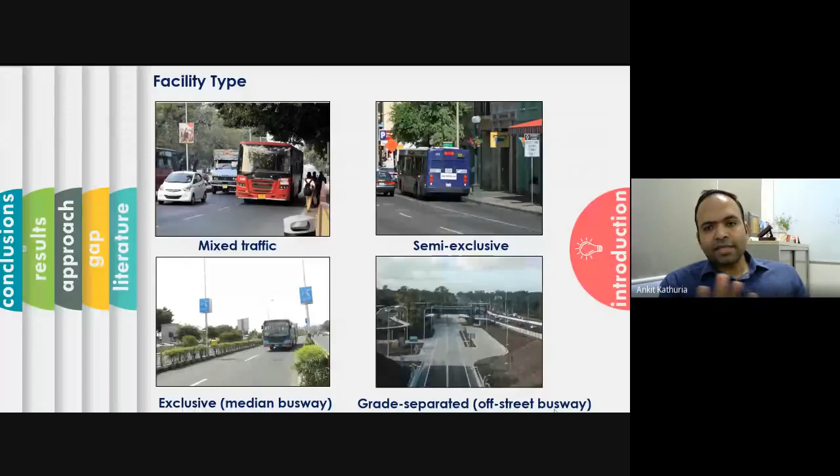So these are the four facility types I wanted to discuss regarding bus transit systems. We are more interested in the exclusive system, and today I'll talk more about it, which in India is also known as bus rapid transit system.

I have specifically selected this median transit system because in India, at most places you observe, it will always be the median bus transit system.

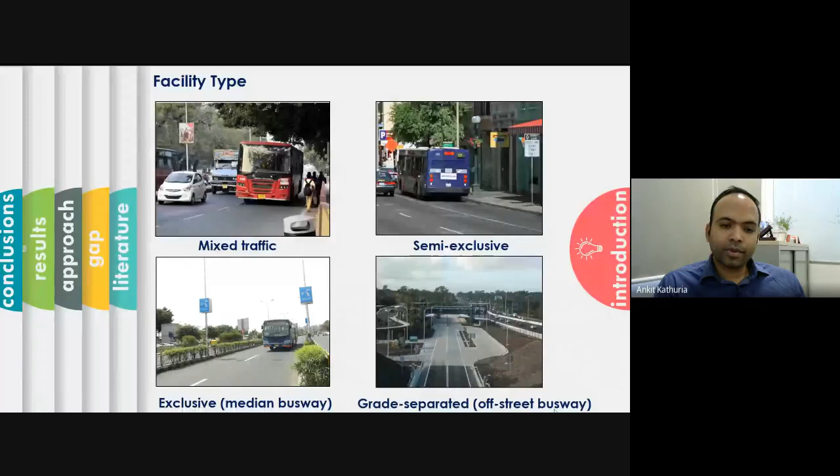Moving further, after explaining the facility type, it becomes important to give some data-based understanding. This figure is taken from the Transit Capacity and Quality of Service Manual, a very famous manual used for understanding operations of bus transit systems. However, for India, we don't have this kind of manual as of now, so we are using the TCQSM, given by the Transportation Research Board, USA.

From that manual, it clearly specifies what kind of operational service each facility type offers. If we consider vehicle speed compared against some base condition, an exclusive median lane system performs better than a mixed traffic system, and a grade separated system performs better than the exclusive system. This just shows the difference in terms of the speed offered.

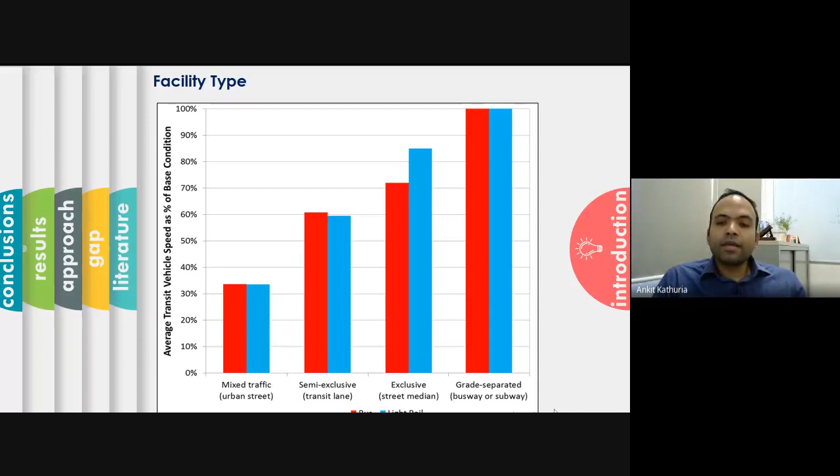When we talk about transit operation, meaning operation of this bus system, there are three important parameters to keep in mind. This is based on the definition given by the so-called father of public transportation systems, Vukan R. Vuchic, who clearly states that transit operation deals with three major factors: the first is capacity, the second is speed, and the third is reliability of the system.

Capacity, anyhow, we'll be talking about capacity. But understand, all these factors are linked together. Speed is linked with capacity, and reliability is also linked with capacity.

Capacity we are talking about, but for those who don't know what I'm talking about in transit reliability: reliability of a system means that if today a bus unit is coming at 10 o'clock, tomorrow that same bus unit comes at 10:10, or 10:20, and on the third day it comes at 9:50. This tells about the poor reliability, you know, because it's not reliable. In very layman language, I'm telling you the system is not reliable.

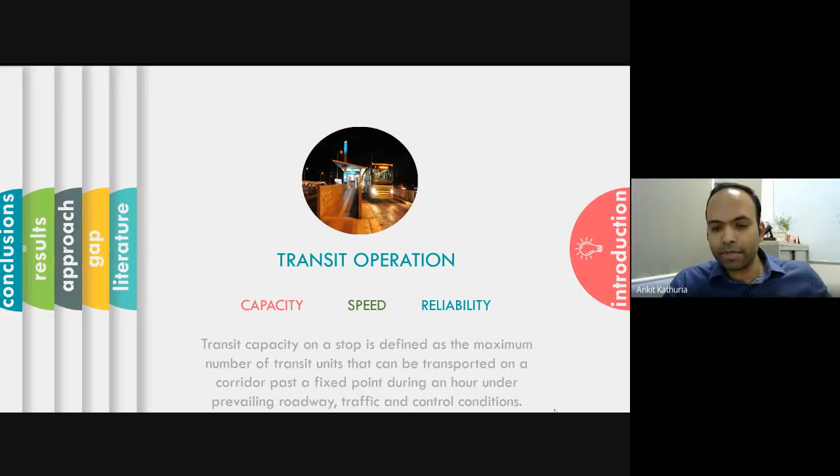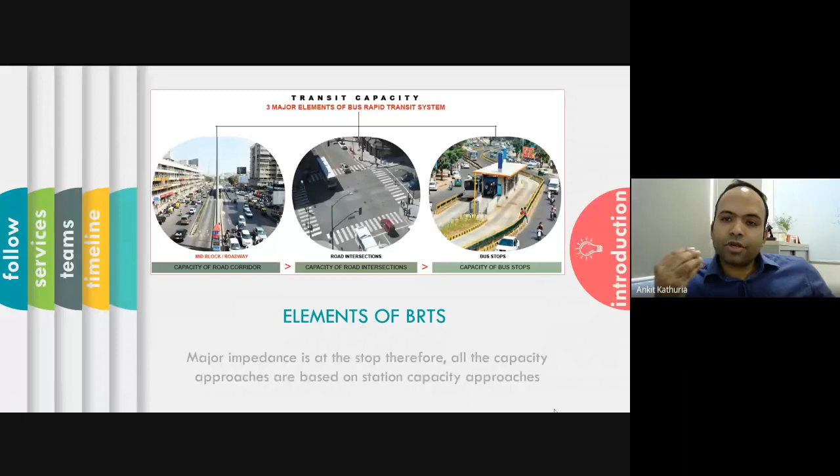Moving forward, whenever we have to estimate transit capacity in any corridor, there are majorly three impedance points. Let's say we are talking about a BRTS corridor - you see the third photograph here, a similar kind of BRTS corridor. So in this photograph, what could be the impedance point? Impedance point means where will your vehicle be stopping. Let's say your vehicle will be stopping at the intersection.

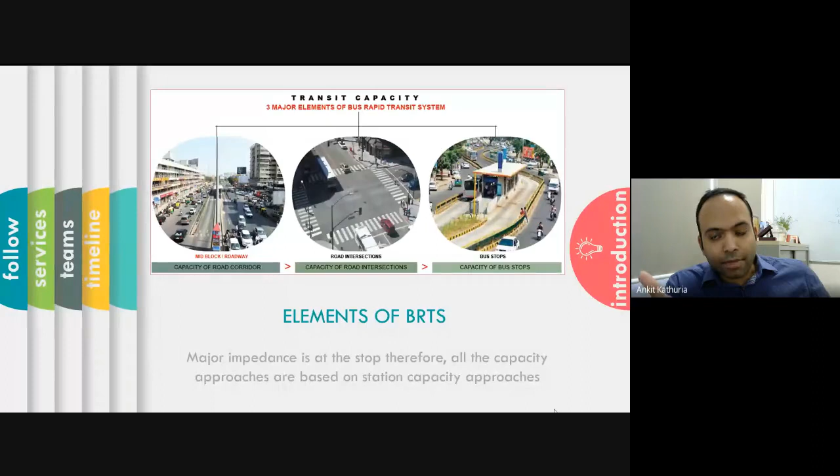Your vehicle may be stopping at a bus stop because it has to wait for the passengers to get down and board. It can also be that this impedance is somewhere in the mid-block. Let's say in any city, for the entire corridor, the BRTS can't be provided. Although the system is named bus rapid transit system, there would be corridors where you can't dedicate your entire road length for this system. So you will allow the buses to move as normal under heterogeneous traffic conditions, and then wherever space is available, the bus will rejoin this particular corridor.

So my point here is, whenever we have to estimate capacity, we have to look at the impedance point - out of all these three points - which is the impedance point where the bus will be stopping for the maximum amount of time. It was observed from empirical data that the bus is stopping for the maximum time at the bus stops, because it has to wait and it is mandatory that they stop. So if this becomes the major impedance point, it will control the capacity, because if it is waiting for the maximum time here, this will be the controlling point.

It is very important to understand that all the capacity approaches of any transit system are based on the stop capacity approach. People usually ask me, sir, if there are signals, why can't we calculate capacity of the signal and that will be the capacity of the bus system? Or people also ask me, sir, there is a mid-block capacity - if there are any PG students, we calculate capacity of any road, any 10-meter, 7-meter road, based on the Greenshields model. It's a model wherein you calculate the flow of traffic that is moving, and based on that flow, you will get a capacity value with respect to whatever speed it is moving. So that cannot be done with the public transport system. For a public transport system, you have to follow the bus stop capacity approach for estimating capacity of a particular system.

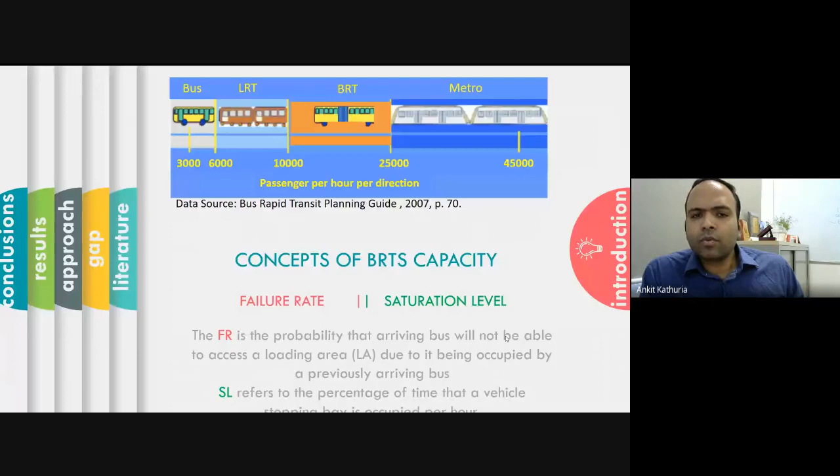Further - sorry, okay. See, there is a reason. Okay, we have seen the delays, but there is a reason why we are estimating capacity. I will take some time on this slide.

Why was there a need to estimate these numbers? When we talk about capacity, we are talking about some numbers - how many passengers this particular system can carry in one hour. Because when an authority wants to take a decision whether we should select a BRTS, whether we should select a metro, whether we should select a light rail transit, or whether we should not go for BRTS and only go for a normal bus transit system, these numbers play a very, very major role.

See, I have put a very beautiful figure here. The capacity in terms of passengers per hour offered by a bus is 3,000 to 6,000. You must be thinking, sir, you just mentioned the definition of capacity in terms of vehicles per hour, but you can convert it into passengers per hour by multiplying with average occupancy - these numbers can be taken in passengers per hour also. So the amount of passengers per hour that can travel in one direction: for bus, it is between 3,000 to 6,000; for LRT, it is between 6,000 to 10,000; for BRT, it is between 10,000 to 25,000; and for metro, it is between 25,000 to 45,000.

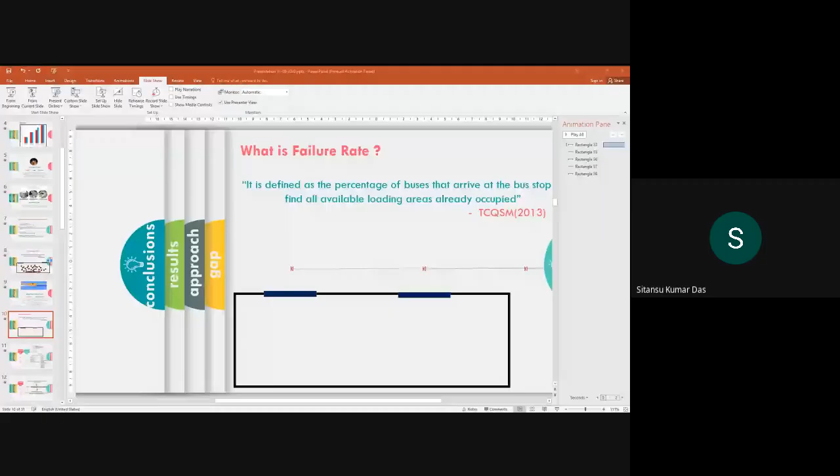Sir, actually we are not able to share the slides with you. Maybe the same problem happened again—somebody shared the screen? If somebody is doing this, please don't share the screen because it creates a problem. It's visible, sir, someone mentioned it's visible. God, it really disturbs the flow. Actually, the energy of teaching sometimes goes with doing all these things. Pin the presentation screen. I think the pinning of the screen needs to be done at my end. Let me understand.

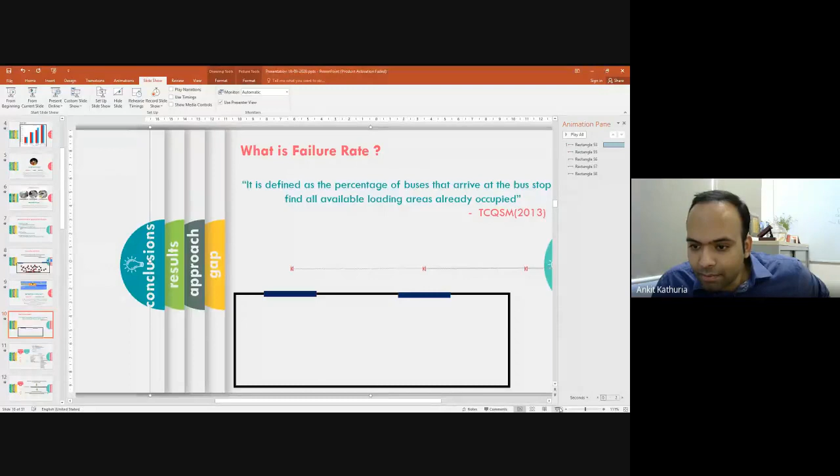All right, I think the rest of you can just switch on your microphone, no worries. Again, stop me if it's not visible. Okay, it's the best I can do sometimes. God, it happens, it happens with the online thing. Every now and then we are just taking online lectures. So anyways, Professor Das, just stop me, no worries, I'll repeat again.

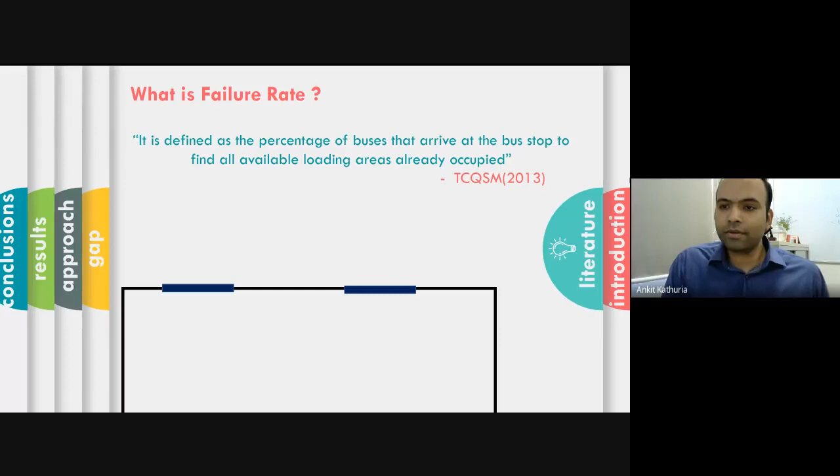Okay, so a brief animation I have prepared for this failure rate to explain what is failure rate. I've already explained in my words, but it is important for you to see. When one bus comes, it dwells for the passengers to board and alight.

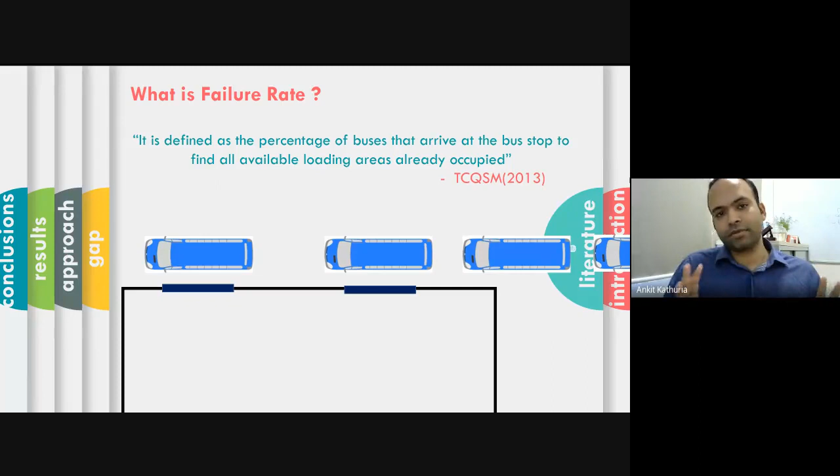Another bus is coming, it is dwelling, waiting for passengers to board and alight. Now, every subsequent bus that is coming and waiting in queue is nothing but coming under this failure rate calculation—very simple. We'll see in detail how this percentage of buses which are coming and getting delayed is used in calculation. It's a very interesting concept, by the way.

So till now we have looked at these two: one is the failure rate approach and one is the saturation rate approach. But it's important to see that these two approaches have been used in literature for quite a long time. The failure rate approach is still in use.

But there is always a clash—half of the industry and researchers say we'll use the failure rate approach, others say saturation level approach. There are some problems and issues with both of them, and I'll explain. That's why there is always a clash.

So when we talk about the basic capacity formula, you guys have to be with me in this formula, because if you understand this, then the rest of the slides will be just a cakewalk.

You are estimating capacity. Please understand, in the numerator it is the seconds in hour available for bus movement, and in the denominator is seconds that the bus occupies the stop.

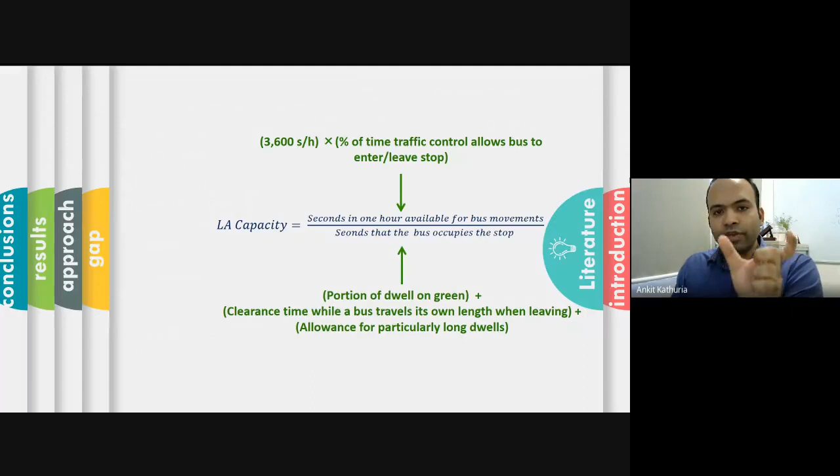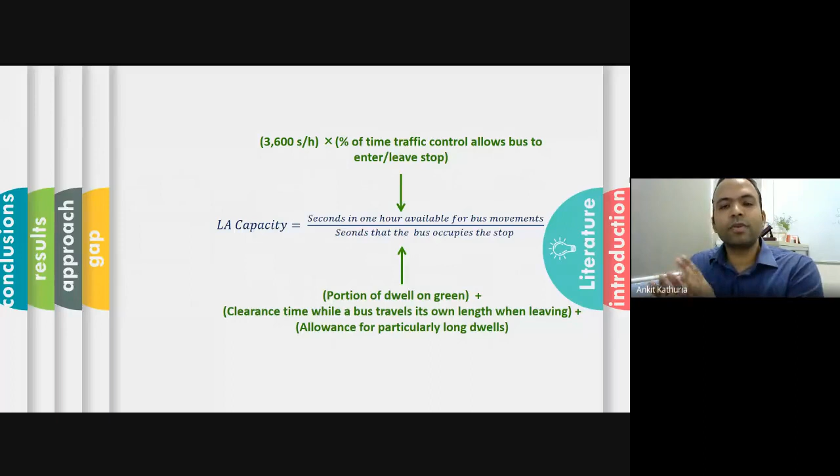So what we are doing in this numerator to estimate a value, we are multiplying 3600, which is number of seconds per hour, by the percentage of time traffic control allows to enter or leave. This percentage of time can be converted in the form of green is to cycle time. Every signal has a particular cycle time, so we can convert it into green is to cycle time, which will give you this percentage of green time in a particular cycle time. Now this numerator is multiplied by 3600.

Further, in the denominator, this tells you information that is seconds that the bus occupies the stop. So for the time the bus will occupy the stop, this will include the portion of dwell time, time for boarding and alighting, and clearance time, like the time for the bus to travel its own length and clear the stop, which is also time wasted in the public transportation system.

Third is allowance for particularly longer dwell. If you are estimating capacity, you have to keep some factor related to probability, that we are allowing for particularly long dwells. Not every dwell time will be at average dwell time.

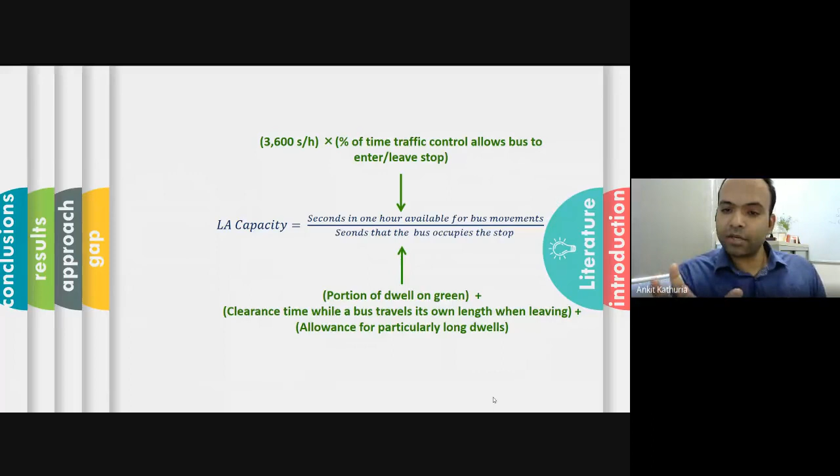Let's say average dwell time is 15 seconds. Not every bus will come at 15 seconds. Some buses might stop for 15 seconds, some may wait for 20 seconds, some may wait for 22 seconds also. So we have to allow for particularly longer dwells, and that particular factor will also go in the form of this denominator.

And now the thing will become more clear when we look at this particular formula. So this is what I was talking about. 3600 here is nothing but the number of seconds in an hour available for the bus movement.

Green is to cycle time means that if there is a signal and there is a certain cycle time in that signal, that cycle time will comprise green time, red time, yellow time, and out of that particular cycle time, how much is the green time? Only that particular time will be allowed for the movement of the traffic or the movement of the buses. That will cause a reduction in the number of seconds available for the bus movement.

If there is no signal, if the bus is not near the signal, you take this G by C as 1. You are dividing this term by a clearance time, which I told is the time taken by the bus to cross its own length.

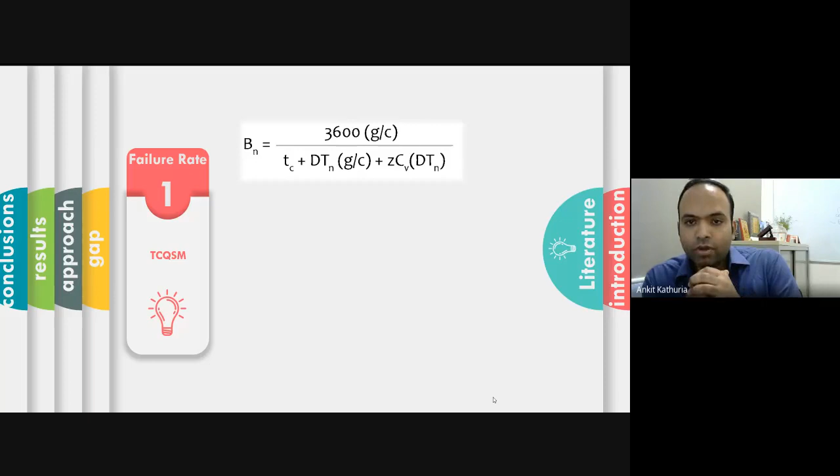Then the dwell time - you're also multiplying the dwell time by G by C. Why are you multiplying the dwell time by G by C? Because if your stop is near the signal and it's already green, but your bus is still stopping, you are wasting that time. So that's why we are multiplying this G by C with the dwell time plus allowance for a particularly longer dwell.

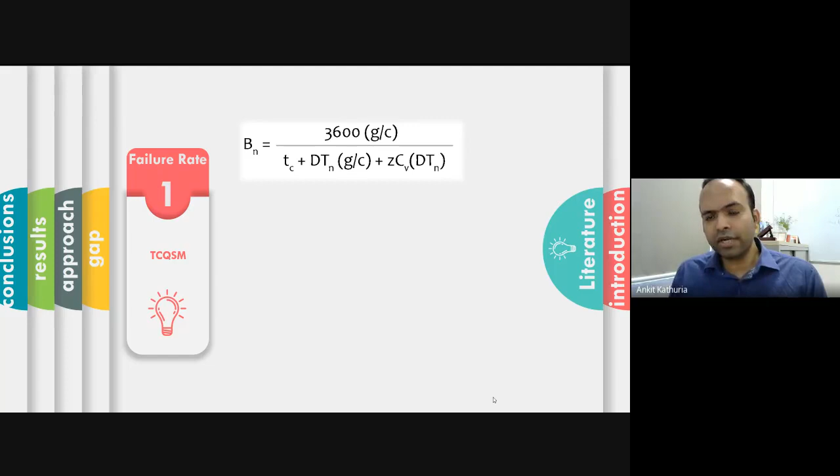So this particular term is converted into three terms, which are Z, CV, and DT. Z is a term related to the distribution of the dwell time - I'll explain how it is related. CV is the coefficient of variation of dwell time, and DT here is nothing but the average dwell time.

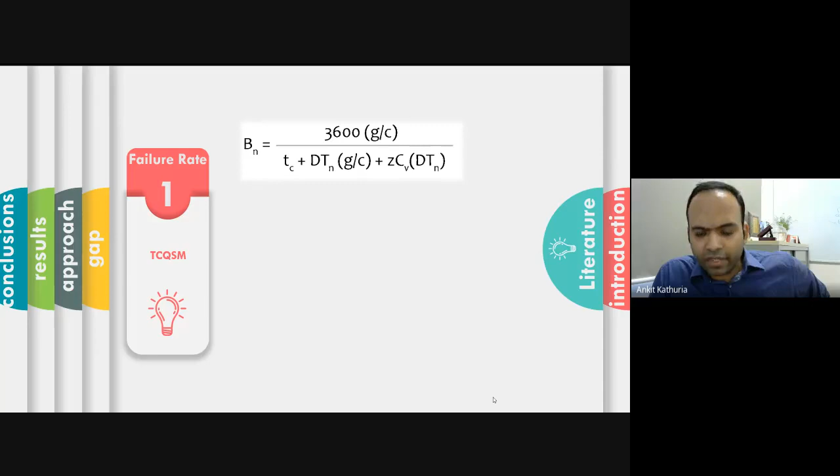So note the equation. Why am I explaining this? So that you are comfortable with the parameters. This is what BN talks about, the capacity of a particular loading area. 3600 is the number of seconds, as I've already talked about. G by C is the green time ratio. Z is the standard normal variable corresponding to a desired failure rate.

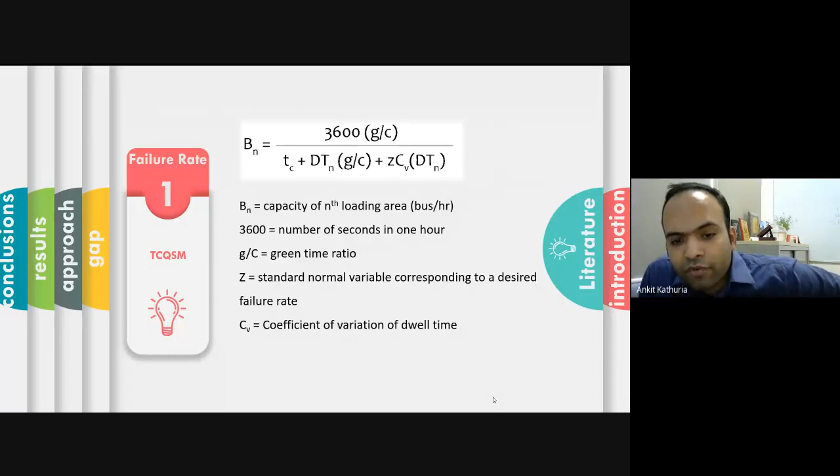This Z value that we will be estimating, we will connect it to failure rate, and then we will do the estimation. Further, CV will give you information about the coefficient of variation of dwell time. Now, this particular term ZCV(DT) is nothing but what is known as operating margin.

Why is it operating margin? Because it is the maximum amount of time that an individual bus dwell time can exceed average dwell time. So as I explained, not every bus will come at 15 seconds - some buses can come a little later also. So in that case, you are providing for that extra allowance. This is nothing but why it's known as operating margin, or TOM.

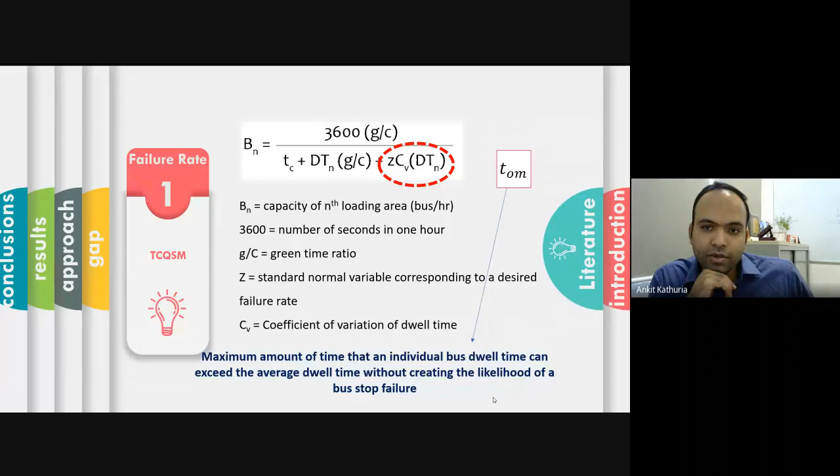Moving further. So we were talking about, sorry.

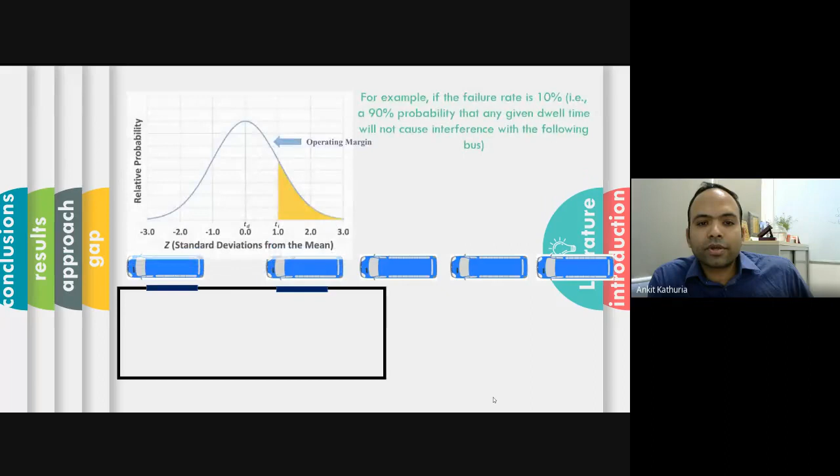Failure rate here is the percentage of these buses which are standing in queue per hour. How many percentage of buses stand in queue, though that particular data is linked to some kind of normal distribution. So don't get confused.

Normal distribution here is a distribution of the dwell time. This failure rate is checked with this normal distribution. For example, if the failure rate is 10%, that is, 10% of the buses in a particular hour are not finding the loading area free, then based on this distribution, there is a 90% probability that the dwell time will not cause interference with the following bus.

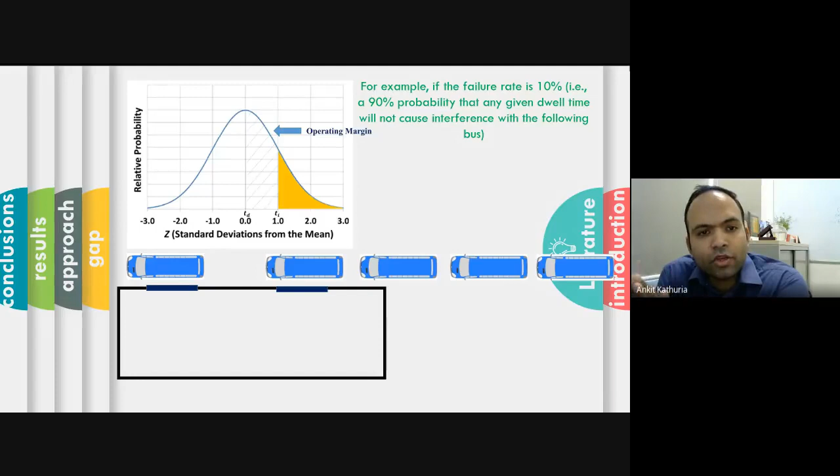So very simply, I'm trying to explain that this 10% value will be used to find nothing but a certain Z value, and this Z value will come from this normal distribution dwell time graph.

A little conversion quickly to understand for students who are not aware as to how we estimate the Z value. Z value is nothing but we are estimating there is a certain average dwell time and there is a certain particular value of dwell time. When we subtract that, divided by standard deviation, we get some Z value. This Z term can vary from anywhere around -3 to 3.

Now, operating margin is estimated by multiplying this Z value with the average dwell time, which is DT here, and the coefficient of variation of dwell time.

So the major assumption of the failure rate approach is that it floats over an assumption that dwell time always follows normal distribution. This is the biggest assumption.

So normal distribution, for UG people if it is getting a little difficult, is nothing but you are modeling your data in a way that it is following a certain type of bell-shaped curve. So you have modeled your data, and this was the closest model of your data, that your data is following some sort of bell-shaped curve.

So this is an assumption of the failure rate approach, but every time your distribution, or the dwell time, will not follow normal distribution. So this assumption, according to some researchers, some authority people, they always question me on this.

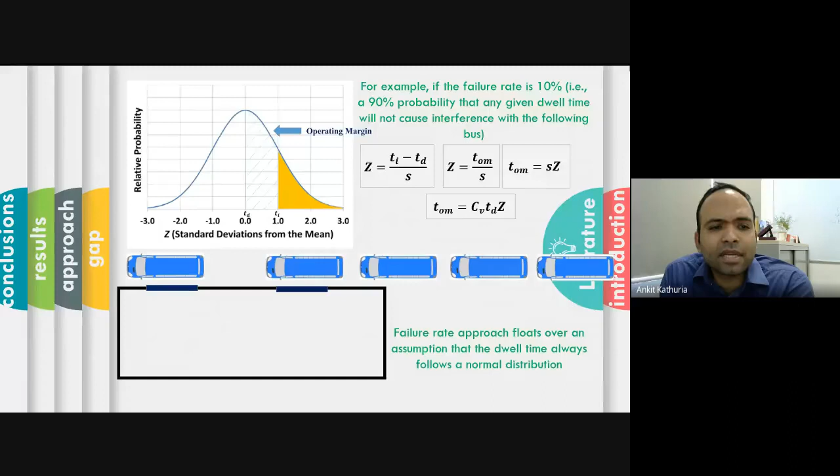Whenever we were working for some kind of transportation, we were making some timetables, we were estimating some capacity of some systems. Every now and then they put a question here: how are you taking a particular dwell time to be normal distributed? So this is one big assumption on the shoulders of the failure rate approach, for which many people are not comfortable with.

Now, the next important method is the saturation level. So the formula that you just saw was the failure rate approach, and the formula that you are looking at now is the saturation level approach. It is all a similar kind of formula.

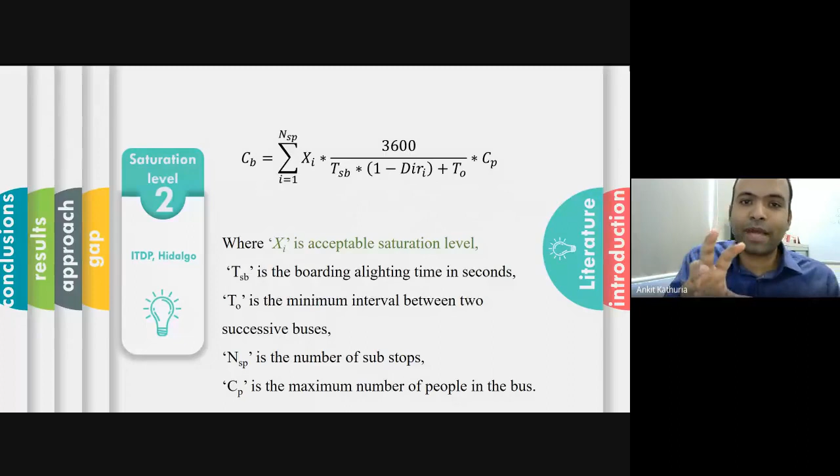You are dividing 3600, which is the number of seconds available per hour, by similar kind of parameters. But the only thing that is changing in this formula is that a new parameter xi has been introduced. In the last formula you saw, there was some operating margin in the denominator. That concept has been changed, and a new parameter xi has been provided here in this particular approach.

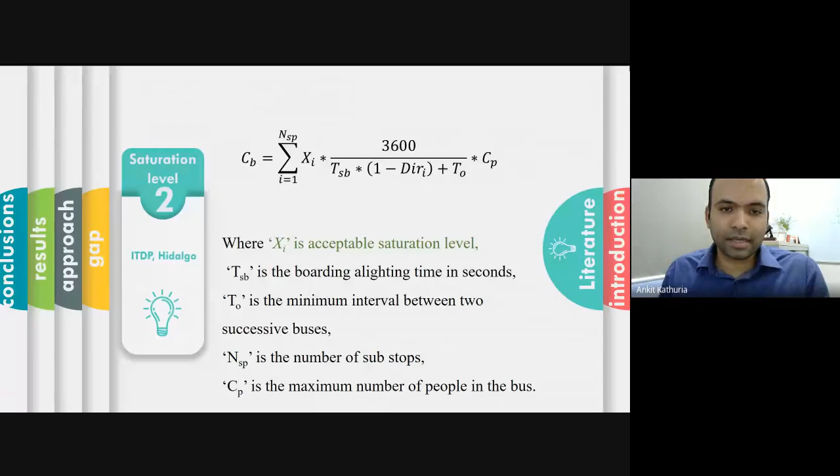And xi is nothing but the acceptable saturation level. It is the percentage of time for which your loading areas were occupied. So let's say if it is occupied for 60% of the time, this xi value will be 0.6. If it is occupied for 40% of the time, the xi value will be 0.4. So this becomes the second approach for estimating capacity of a system.

So what were the gaps, and why in India, what was the need? I mean, why I thought of working on it.

Till now in India, we were estimating capacity of this BRTS system considering a 25% failure rate. Without looking at our data, we just considered 25% failure rate. It means that we were saying this is the maximum failure rate which is allowed for a particular system.

Let's say, to be more layman about it, if you will allow a very, very high failure rate, it means that you are compromising with the speed also. Because if you will allow more number of vehicles to wait in the queue at a particular stop, it means you are compromising with the journey speed of that particular bus.

Okay, but for conventional systems, this number was given as 25%. The documents told that you use this 25% number in your capacity estimation to estimate the capacity of the corridor. But the problem came that this 25% number was for normal conventional transit systems or normal bus services. Should this 25% be used for BRTS systems also? Because BRTS systems are dedicated systems.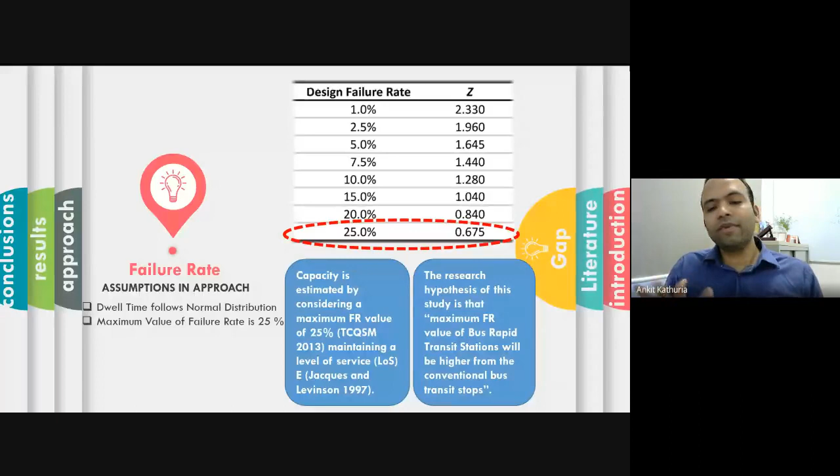considering failure rate. So 25% according to all these old manuals was compared to this 10 kilometer per hour speed. But again a second question came to our mind: if for BRTS systems we consider 25% failure rate, BRTS systems are not meant to run at 10 km per hour. If we consider capacity at 10 km per hour, then we are doing some blunder. So at least we have to put some benchmark, it should be 20 km per hour. Below that, if BRTS is offering that, then it's not a BRTS, it becomes a normal public transport system. So there were many thoughts coming to our mind about how do we play with this failure rate thing?

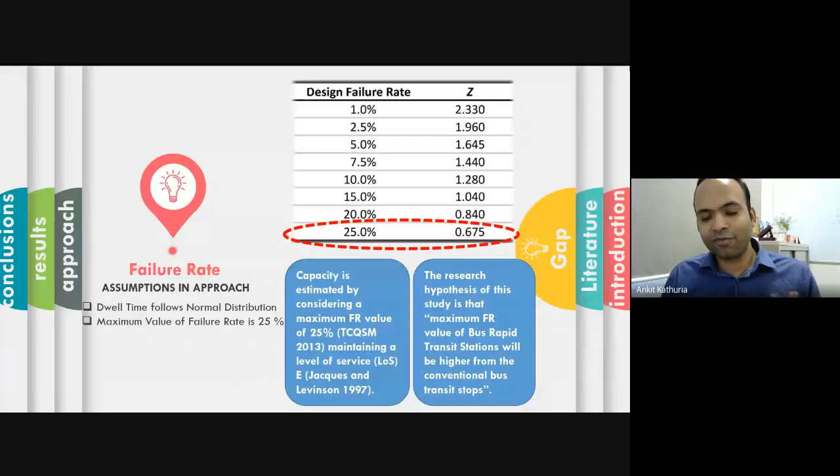You should imagine that there is a problem with doing any study on public transportation systems. The biggest problem is you can't just pour in buses on the field. If there is a BRTS system of Ahmedabad and I tell you the system is moving, now you tell me to add more buses and explain how things change - you can't do it on the field. If I tell you, okay, I want to observe the queue length, please add more buses - on field, it was not possible. So we were forced to use simulation or micro-simulation tools in this case.

One such micro-simulation tool that we used was VISSIM. VISSIM is a very commonly used micro-simulation tool in the transportation industry. You go to any company, many people know it. So in that tool, we got the flexibility of adding more buses and playing with the speed and the failure rate values. So this is just a thought, and this was the reason. And only on this thought, one of our publications came in a very reputed journal.

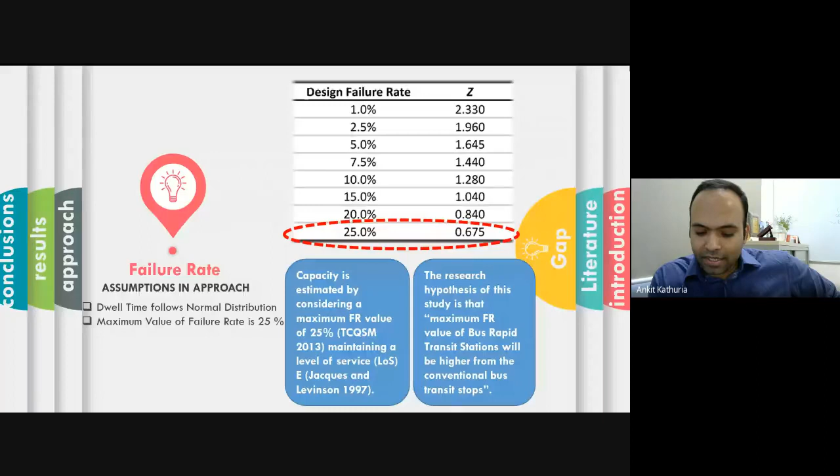So moving forward, even like failure rate, even the saturation level approach has an assumption. Failure rate had an assumption that dwell times are normally distributed, but the saturation level approach had an assumption that we have to select a saturation value of 0.6. The manual tells that you should always select 0.6 in the calculation of capacity. Then the thought always comes, why do we select 0.6?

I mean, you are forcing us to select that - okay, you mentioned that for 60% of the time your buses will occupy these stops, for 40% of the time it will be free. But how are we arriving at that 0.6 value? How can we be forced to use a 0.6 value? So then again, a second level of research comes into our mind: what should be this value of saturation level? Should it be 0.3, 0.4, or should it be 0.8? How do we arrive at that value? So this is part of the saturation level.

However, I will not be discussing saturation level in this class because I'll be explaining only the failure rate approach, moving forward while respecting the time also. So once these things were clear in our mind, we looked at the capacity formula, all these calculations. Don't worry, even I find these calculations very boring, but it is important to tell you sometimes. So when we looked at all these calculations, all these formulas, the next step was to practically take some BRTS system and start doing some work.

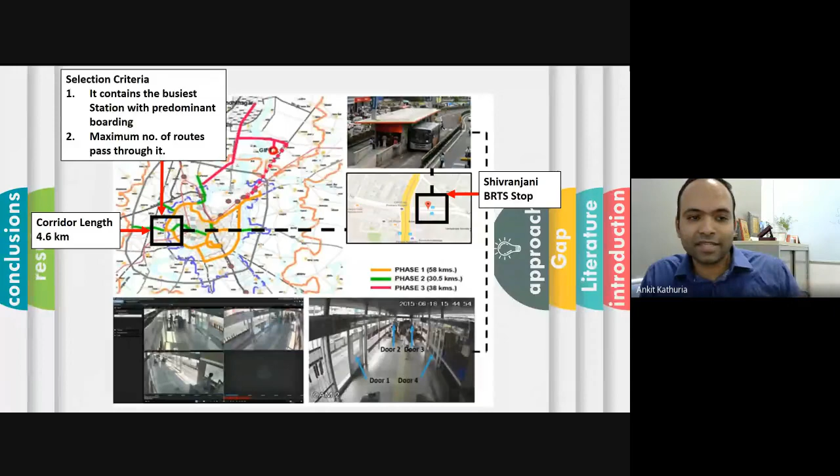So when you are talking about capacities, we have to focus on that particular corridor which is maximum loaded, because we have to give some kind of right calculation. So we focused on the busiest corridor and selected this 4.6 kilometer corridor for our study.

Now, this is how the station looked from inside. It's a very beautiful station. When I saw BRTS, it was my first time visiting Ahmedabad and seeing BRTS. My perception of buses was that bus systems are like any other stops, people standing on the road. But this was a very well managed stop, wherein the ticketing was done before you enter the bus, a very perfect example of a BRTS station or BRTS system. This is how it looks like.

Moving further, once we selected this corridor, the major problem came. These terms we are explaining, we wanted to check how much queuing a bus can take, how much failure rate a stop can take. Doing it practically on field, we were lost. We could not have done it. So that's why we thought we would take help of simulation tools.

We made this network, the entire network. We took a Google image, and then we created the network, the entire corridor, on the Vissim platform. This is a little critical because whenever you're using any simulation model, there are a lot of problems because you have to play with the calibration also of the model. So we calibrated the model for BRTS systems. It was a very lengthy process. There are some parameters by which you calibrate, okay, which in this class may not be discussed.

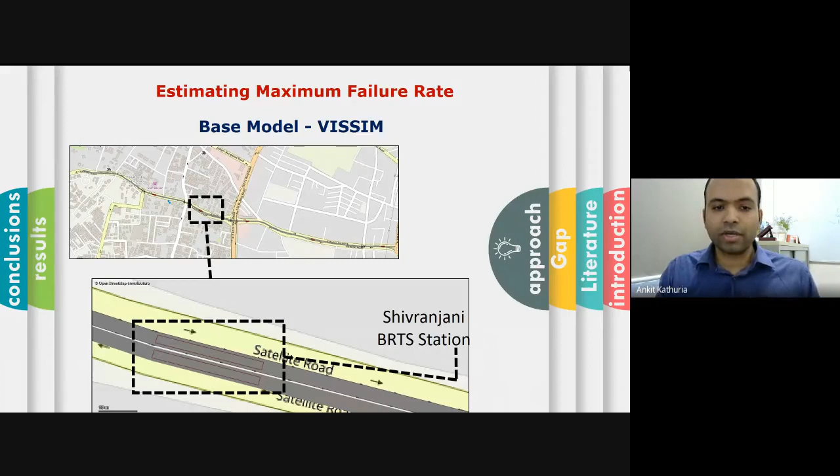And what kind of data did we observe from this, I will show you. This was the kind of data that was observed. We got a failure rate data, we got some kind of speed data with us.

Getting this failure rate data and the speed data, the next step was to divide it into certain clusters. We used some kind of clustering technique to divide the speed data into clusters, and there were other ways too. I'll not explain it here, but imagine you are dividing your speed data into certain clusters to tell what speed is good, what speed is not good, or what speed is average, medium.

Based on that 17 kilometer per hour speed, we selected a particular failure rate value, which came out to be 29%. This proved that for a particular BRTS system, the failure rate value given in the various manuals used abroad was not quite accurate for Indian conditions.

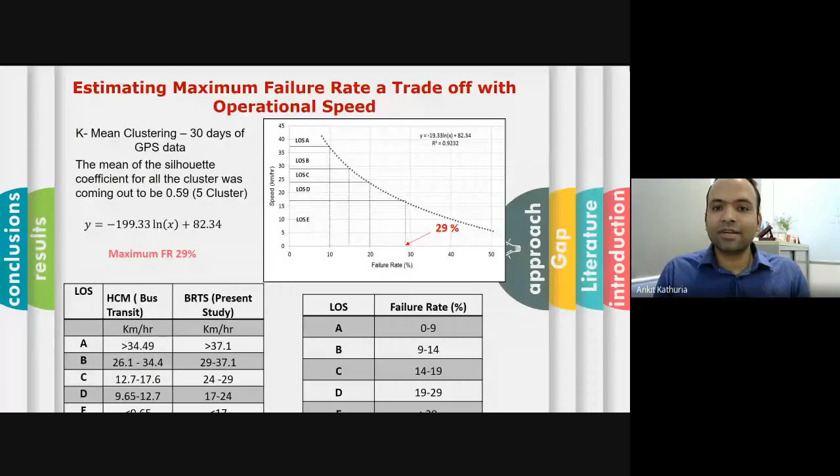We have to assume that BRTS systems are a little bit similar in nature, because there are two loading corridors everywhere, and they are dedicated everywhere. So the data is still reliable, because in these kinds of studies we have to look at the depth of data rather than the breadth of data. I'm just defending my study, nothing else.

We also suggested some modifications in the capacity formula. I will not take you into the mathematics of how we suggested it, but for those interested, you can read the papers I'll put in the conclusion slide. There were some formulas that were improved and given by us. This is how it looks like.

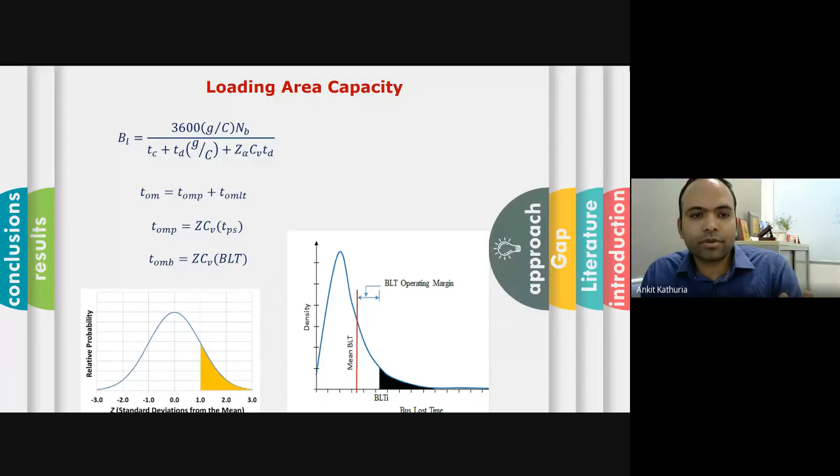Loading area 2 is occupied, and you can't move to loading area 1 because there's no separate lane to move there. So there's some loss in efficiency of loading area 1, because your buses are waiting behind loading area 2. One bus has left loading area 1, loading area 2 is now occupied, but it stops the other bus from going to loading area 1. So there is some loss in efficiency of loading area 1.

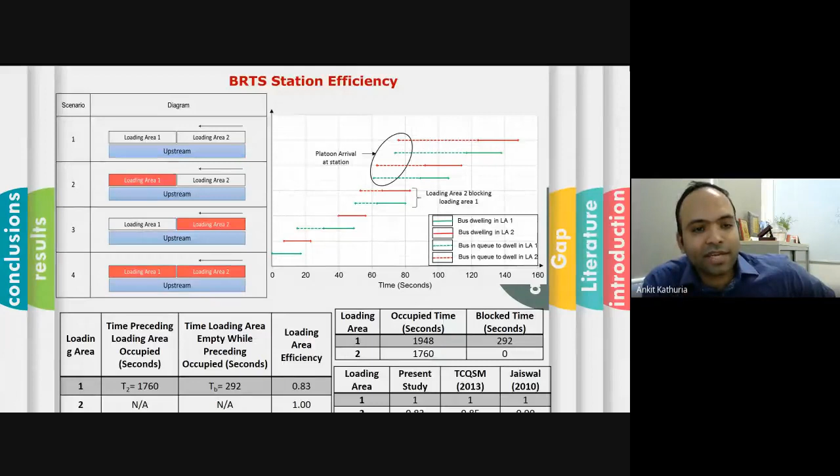This is a very important thing. Even this creates a problem in calculating the capacity. We did this based on trajectory data, though trajectory data isn't strictly required. Even by simple calculation, if you collect data for a day or two, you'll understand how much of the time scenario 3 happened.

For how much of the time did it happen? Some 30 minutes in the entire service period, 40 minutes? Based on that, you calculate the loss in efficiency. Without entering much into the calculation, and respecting the time, this loss in efficiency for loading area 1, by our calculation, turned out to be approximately 17%.

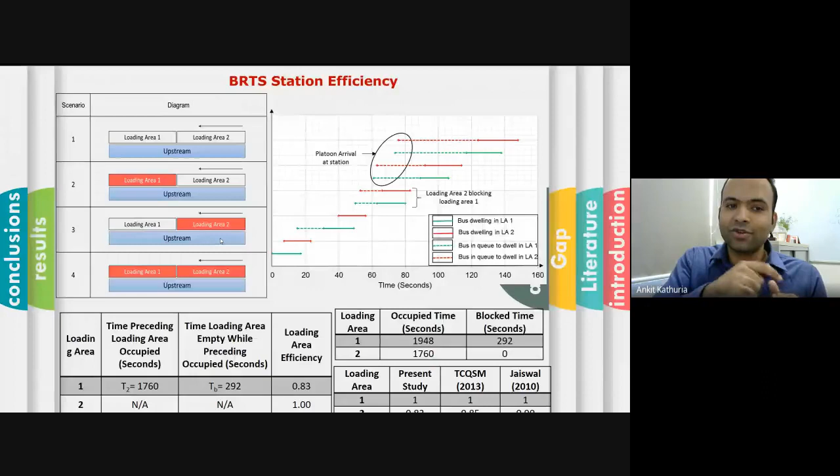So there will be a 17% loss in the efficiency of loading area 1, because it was not allowed to dwell, since it was practically not possible as loading area 2 was already occupied. So once we estimate capacity, we have to multiply the capacity of the first loading area by 0.83, because there is a 17% loss. This is one thing that has to be kept in mind.

Once we learned all these models, we calculated failure rate. Now we had to further apply this. We collected data for a particular corridor, after coming out of simulation. Now we were supposed to estimate capacity. Whatever formula we had calculated, we had to give it to practitioners, saying take this approach, it's very simple, and calculate the capacity. Now for a corridor, this was supposed to be done.

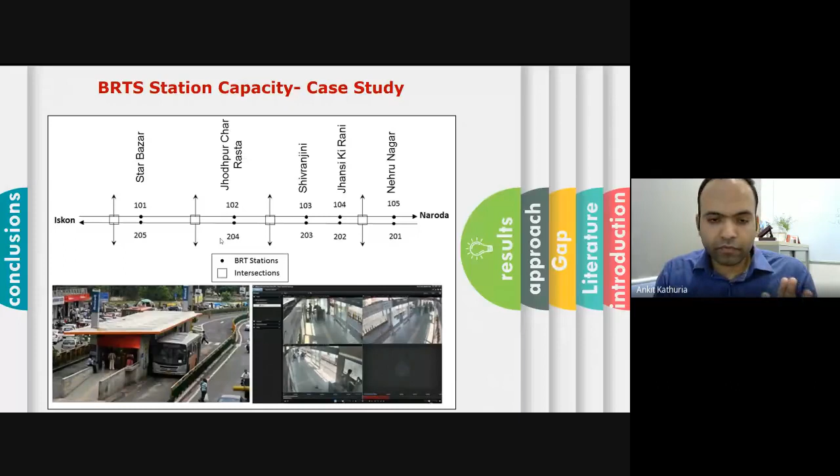What we did, we calculated all these parameters. We calculated dwell time. We calculated if there was a signal, and the signal time. We calculated the failure rate using a videography survey. Even if videography survey is not possible, failure rate can be estimated for a car by a person just standing there and noting down the number of vehicles which are not allowed to get a dwell because the loading area is already occupied.

Then other parameters, like clearance time, to be more specific, we estimated clearance time in the peak hour as 10 seconds. Usually it took 10 seconds for a bus to cross its own length and move ahead of the stop.

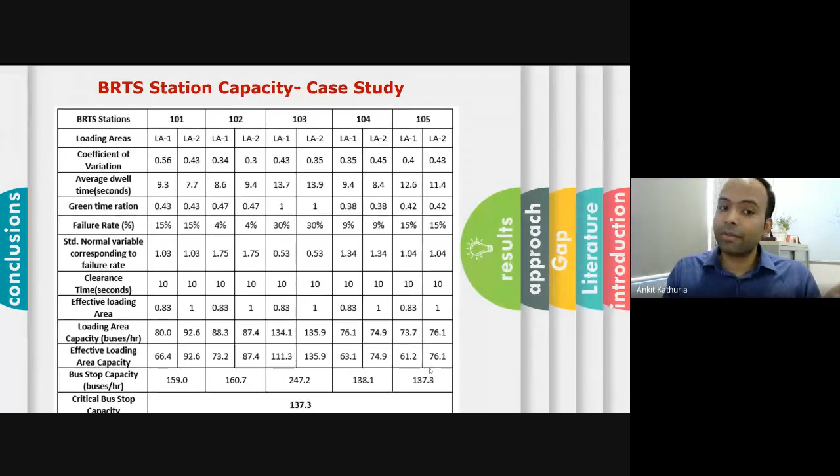This is for one stream. For the downstream, because the bus movement goes the other way, values were again worked out, and the minimum critical value came out to be 137 buses per hour, which can move. But the failure rate we used here was the actual failure rate collected on site. Since we were also supposed to calculate capacity based on the maximum allowed failure rate, we calculated this capacity based on a 29% failure rate, by just replacing this value.

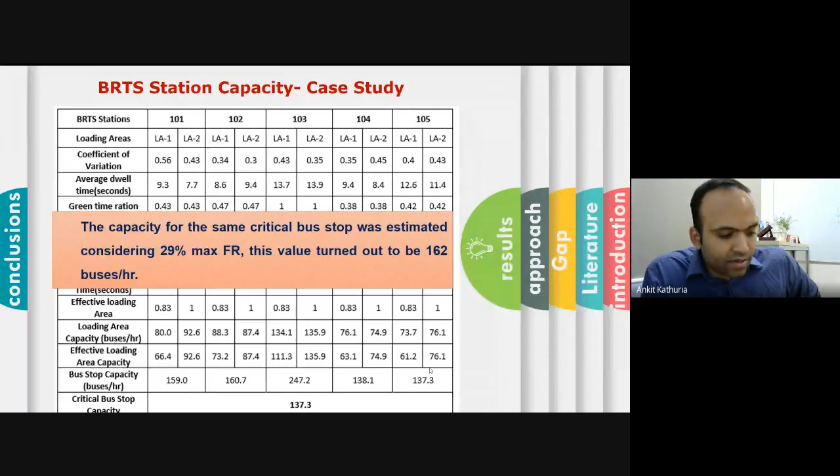And then we got a total capacity in the range of 162 buses per hour in case of the Ahmedabad BRTS system. Now you can multiply this 162 with the number of passengers also. There's always a debate about this number, that these numbers are too low or too high, but we won't enter into that discussion now, since we'll take questions regarding that.

So what were given as part of the conclusion? As part of the conclusion, the present study approach proposed a maximum failure rate of 29%, which is 4% more than the maximum failure rate value of conventional bus stops. Further, a revised approach to estimate capacity of a BRT station was suggested in our study. Further, there is a need to investigate maximum saturation level.

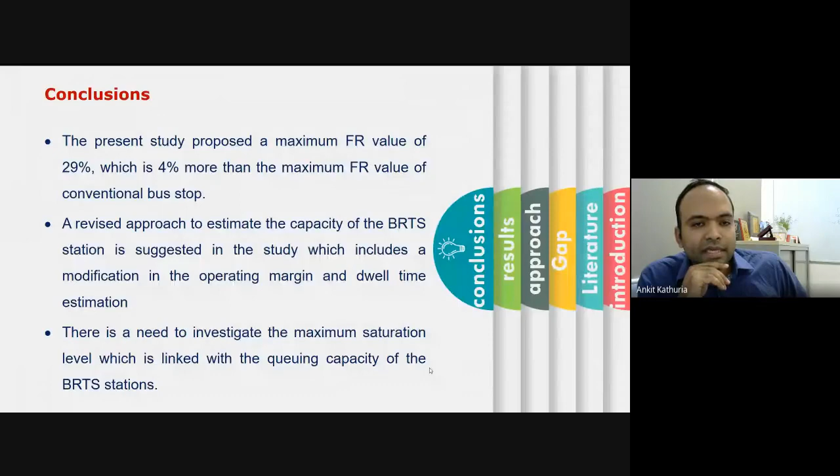We didn't look at the second approach in this study because of a limitation of time. But it is being suggested that further research can be done, which hasn't been done till now, to play with the saturation level approach. We have to link it with queuing theory, and then develop some kind of acceptable saturation level. So this goes as part of the conclusion.

To understand a little more about this concept and how the data was collected, you can look at one of my recent publications in the ASCE Journal of Transportation Engineering, which has just come out, very recent. Also, a little information about failure rate you can get in another journal, in ICE Transport. And if you want to understand the concept of bus loss time in more detail, how that was estimated on site, you can look at the second publication, related to the Journal of Public Transportation.

I completely understand that since the time is up for my lecture, this lecture for some might be a little more technical, because in UG teaching we are not taught about all these things at times.

But understand, sooner or later, these kind of subjects like public transportation operation, public transportation planning should be floated at UG level as part of departmental elective, wherever scope is there, or maybe some open elective courses. I may also request Professor Das that these kind of courses may be floated at times, if possible.